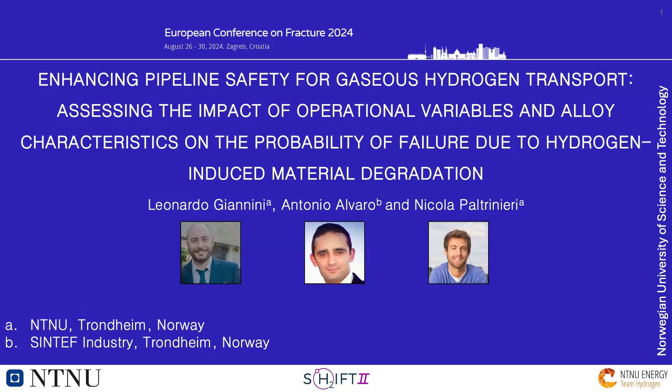So today we are going to discuss a topic that is not really the usual here at the Hydrogen Symposium, because I'm not an expert in material integrity. What I do my PhD in is process safety, and especially with risk-based inspection planning.

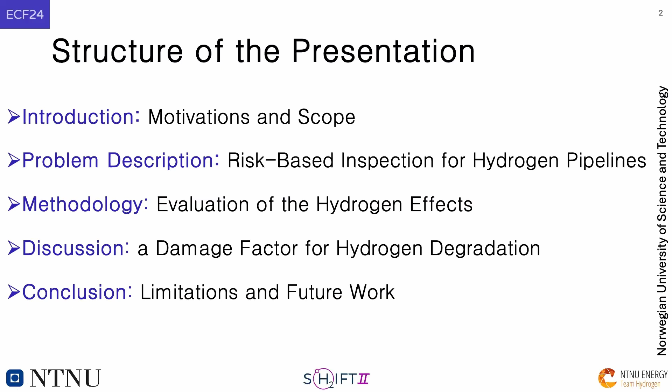So today we are going to discuss some of the commonalities, the common points that we have between what you study, what you do research on, and what can be used for the safety of hydrogen technologies, especially for a promising technology that is hydrogen pipelines. And so we will discuss the topic of risk-based inspection planning that is rooted in concepts of material integrity.

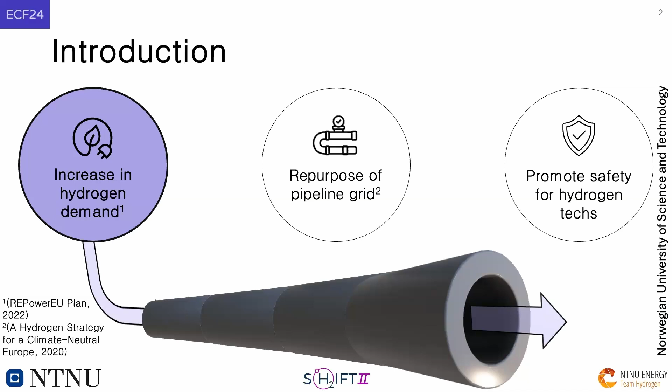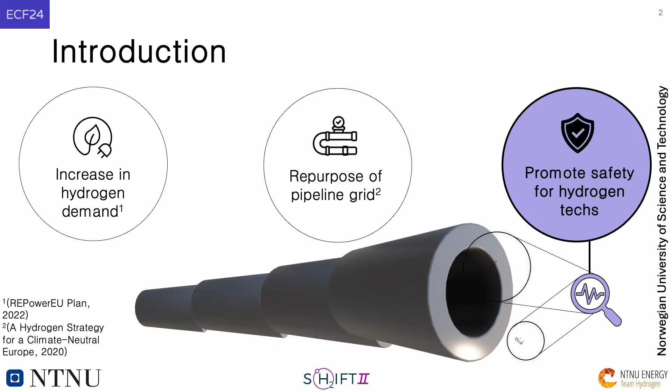So, as it was discussed in the previous presentation, there is an expected increase in the hydrogen demand in the following years, following big projects such as the REPowerEU plan, a hydrogen strategy for a climate neutral Europe. And this increase in the hydrogen demand will lead to repurposing of the pipeline grid. And so our main scope is just to promote the safety for these technologies.

But we have a problem. We have a lack of operational experience concerning hydrogen pipelines and the inexistence of dedicated inspection and maintenance standards. These lacks can lead to uncertainties concerning failure probability and failure consequences.

And so to discuss this in a more proactive manner, I have to just tell you what RBI is, what risk-based inspection planning is. So when you have a component that is exposed to a degrading, a harsh, a corrosive environment, such as a hydrogen gaseous environment, you could theoretically use a risk variable to be associated to this component. And of course, this risk value will increase over time.

And at the end of a period, this risk value will increase until it reaches an established threshold. And this is the time of inspection. This is the time when you go there, you take a look at what happens, you see the component is still good to go, or we need to do maintenance activities.

The problem is that we don't have a methodology to evaluate how this risk evolves with time when it comes to hydrogen systems. We could disregard the hydrogen damages, but this can maybe lead to an underestimation of the risk level, which is maybe unacceptable, or we could be too conservative. And this can reduce the risk of an unwanted event, but on the other hand, it can raise the costs associated with a safety budget.

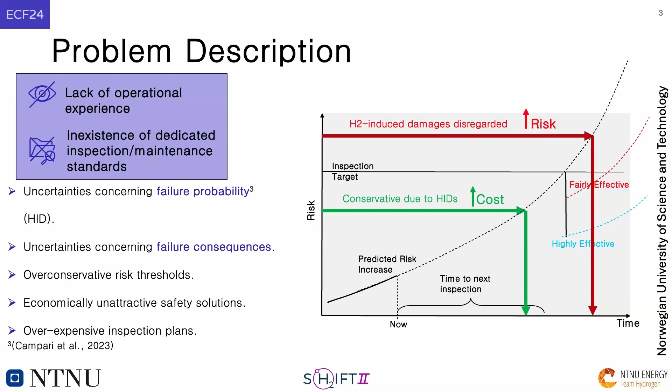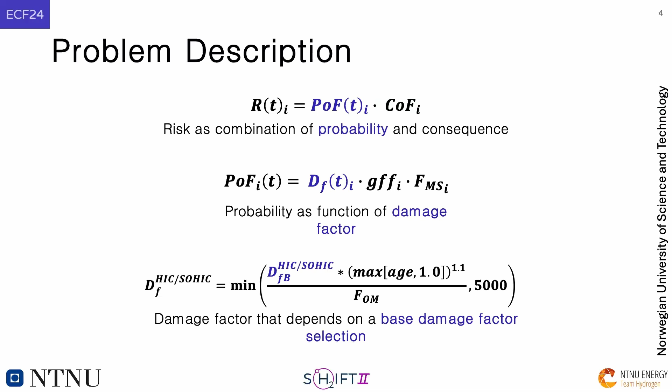So just to make this more concrete, I have to tell you how this risk variable is calculated. Risk is simply the combination between failure probability and consequence of failure. The consequences of a failure are estimated based on financial consequences, potential for loss of life, business interruptions, and so on. While this probability of failure is based on this damage factor. Simply, this damage factor is what connects the material degradation, the material integrity, with the variables that are relevant for risk analysis.

And this damage factor, as you will see in the bottom equation of the slide, is depending on the age of the component, age of the equipment, so the time of exposure to the harsh environment, and on another parameter that is called base damage factor, DFB, which is none other than this number here, which was appearing in the other equation.

And so if you look at the existing standards, the most established is the API Recommended Practice 581. They give you methodologies to calculate this number here. And so you have this evolving factor that then is used to calculate your failure probability.

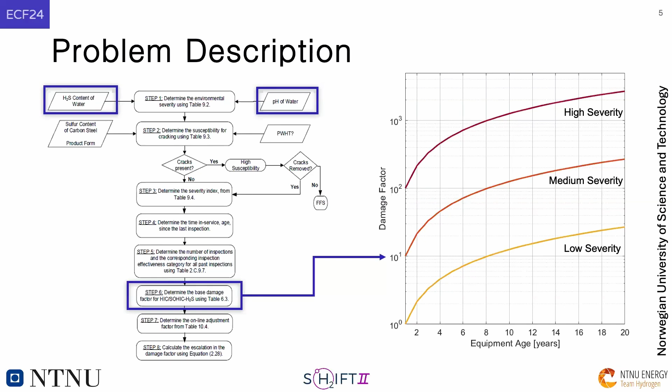The problem is that they ask you for the pH of water and the H2S content of water. And this is just an example, but all the hydrogen damages in the methodologies are rooted in these parameters that, of course, are not relevant at all for gaseous hydrogen transportation.

And how can we solve this problem? Well, what I would like to tell you today is that we think that a methodology that is based on what you study, on the matters of material integrity that you publish every day, could be built.

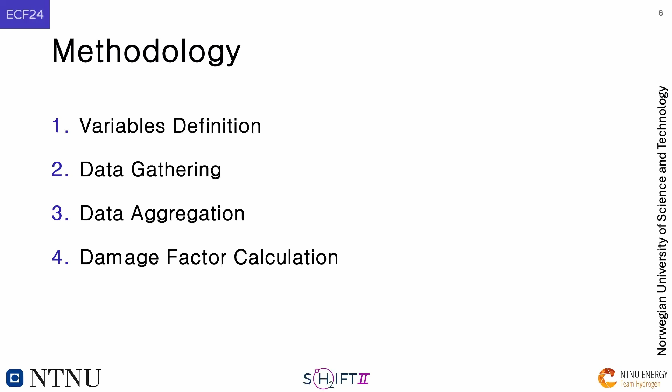And we think that this can help the spread of this promising technology in a safe manner, but we have some problematics that we need to discuss. First of all, we did a literature review, and we noticed that usually on a macroscopic scale, the effect of hydrogen on pipeline steels is described through, for example, the effect on tensile properties. Yesterday, there was a presentation on embrittlement index, relative failure elongation, relative reduction of area, which is used to describe the hydrogen damage. But also some other researchers researched the fracture toughness, such as in the previous presentation.

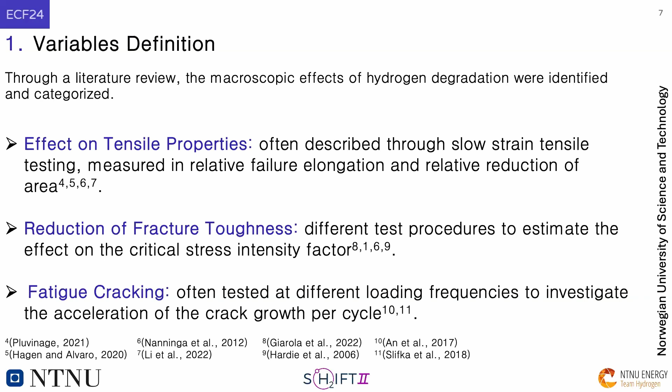And different test procedures can be used to estimate the effect of hydrogen on the critical stress intensity factor, for example. Other researchers focused on the fatigue cracking, which is often tested at different loading frequencies to investigate the detrimental effect of the molecule. And each of these parameters is governed by several variables, such as pressure, loadings, additives, defects and welds, the grade of the steel, and so on.

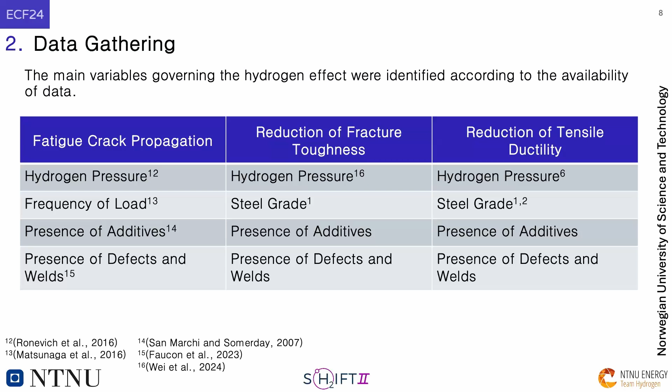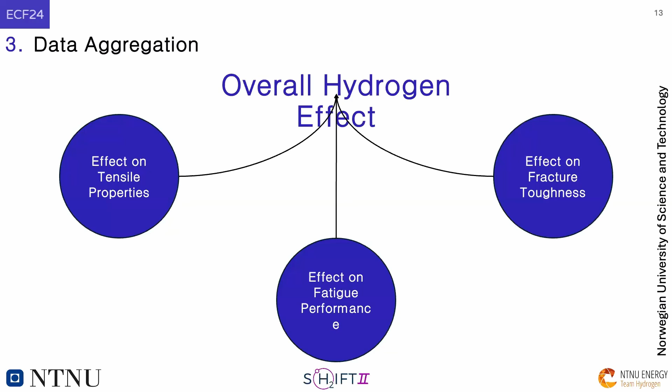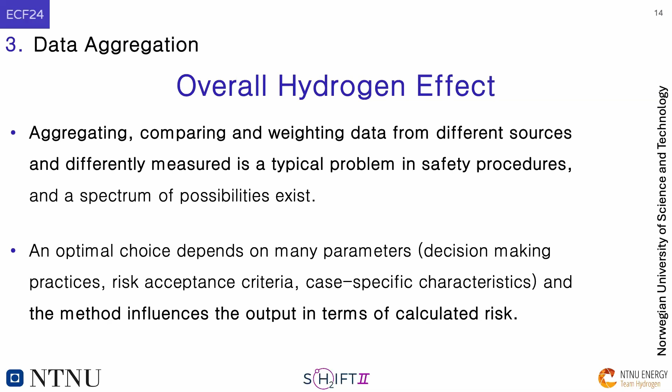So this will lead us to the main point of this presentation. How can we have an overall hydrogen effect? This is a typical problem in safety because aggregating, comparing, weighting data from different sources is always very, very tricky. And we have a spectrum of different possibilities to do data gathering and data aggregation. An optimal choice, of course, depends on many parameters, decision-making practices, risk acceptance criteria, case-specific characteristics, and of course, the method that is used will influence the output in terms of calculated risk.

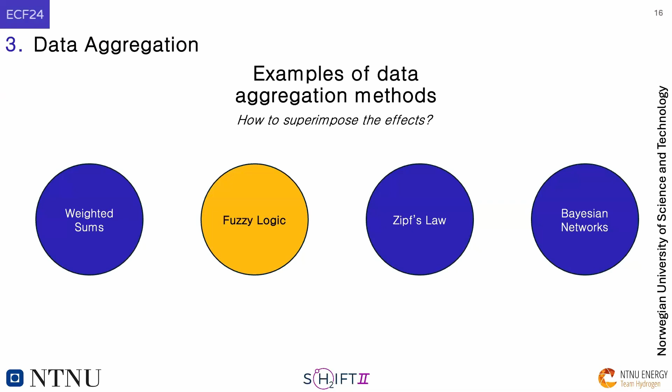Here is just an example of different models that can be used. And just to give you a taste of what an overall model can look like, we selected a decision tree based on fuzzy operators, and we think that it could look like this. So if you look at this tree, the output of the top of the tree is this base damage factor, what we want to propose as a new methodology. The branches are the different effects on a macroscopic level: fatigue performance, loss of fracture toughness, reduction of tensile properties.

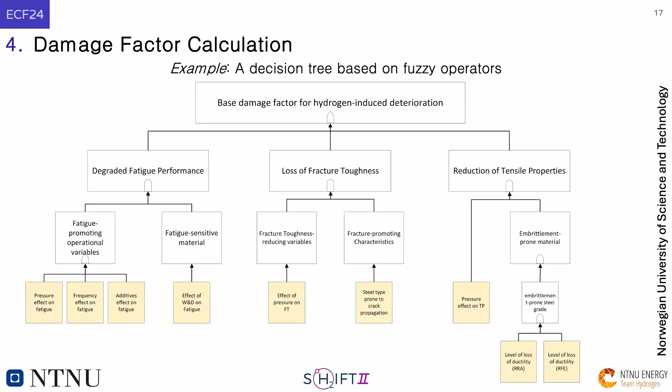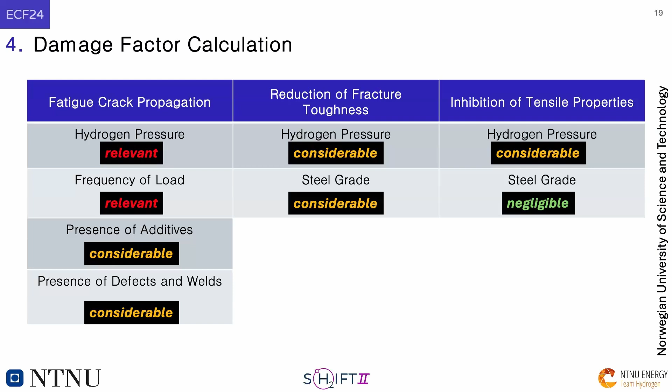And the leaves of the tree, the yellow boxes, try to figure out what is the hierarchy of the variables governing the damage. In a first attempt, they could be evaluated on a qualitative level, and maybe later evaluated quantitatively. So, as I said, in a first attempt, we could tag each of these parameters with a label, for example, negligible, considerable, relevant, depending on the case-specific characteristics. If we have a pipeline that is, for example, subject to fatigue loading, the effect of pressure and the frequency of the load can be more relevant than the effect of the steel grade on the tensile properties.

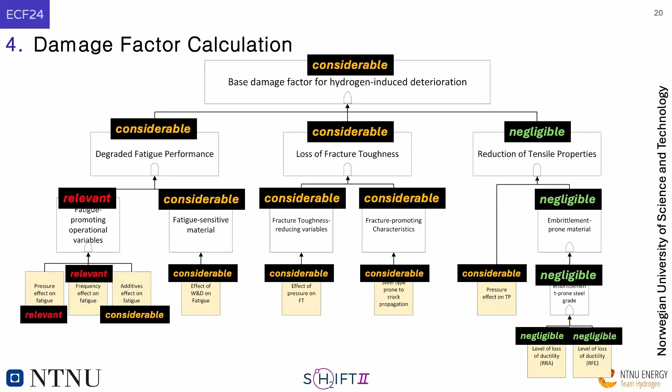And entering this logic tree, using these operators to compare the various variables, we could end up with a final output for this base damage factor, which can be then translated into a crisp number and used to calculate our failure probability. This, we think, can be a solution with a bright side, that is the fact that it is rooted on data that are published, available, and done by you mostly, but we have some limitations. In the case of variables identification, we still have knowledge gaps concerning the roles of parameters and variables on crack propagation. We also have the problem of data gathering, because as has been pinpointed in the literature, we still have some inconsistencies in testing conditions.

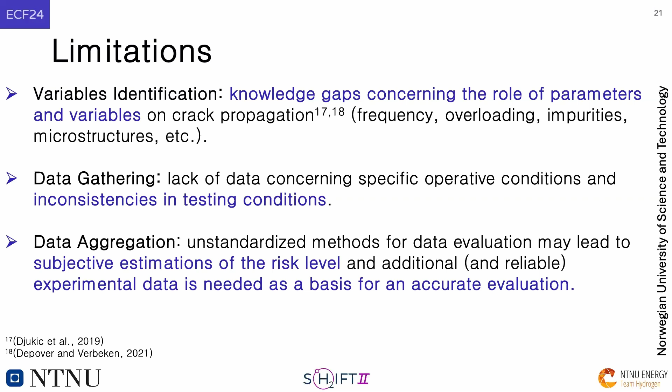And this can actually lead to very big issues when it comes to giving a hierarchy to the data that we use to build the model. And also we have the problem of data aggregation, because we don't have a standard method for evaluating data, and this can lead to subjective estimations of the risk level. And so, of course, the more experimental data we have, the more we will be able to make an accurate evaluation.

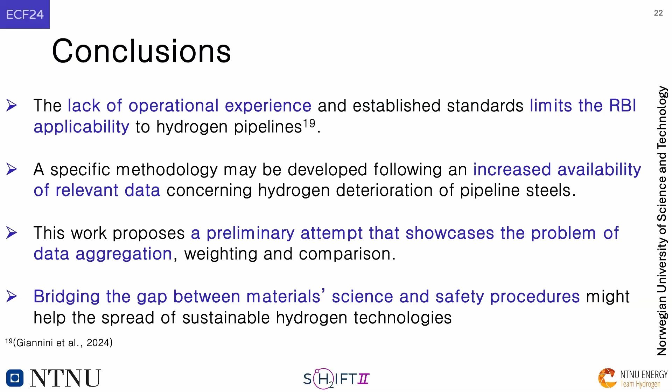So to conclude, today we have a lack of operational experience and established standards, and the RBI applicability to hydrogen pipelines is still limited. A specific methodology might be developed following increased availability of data. We proposed just a very preliminary attempt that showcases the problem of data aggregation, and we think that bridging the gap between material science and safety procedures might help the spread of a sustainable and promising technology, that is hydrogen pipelines. So thank you all for your attention.